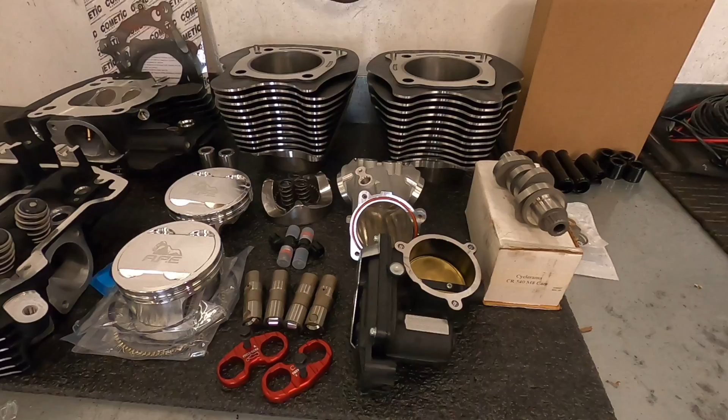But today, as the title suggests, we are doing a cam swap on this bike. So we're pulling out the 540, we're going to be putting in this CR470 and seeing what happens. So why are we doing this, guys? What's the reason for the cam swap? Well, a few reasons. One, I want to find out what's going to happen. Two, I'm sure there's a lot of you guys want to find out what happens. Three, I want some content.

And four, why not? Today, I'm going to be having my apprentice, Mitch, do a lot of the work here. He's done a lot of cam installations for me over the last 6 or 8 months, and he's really starting to get into the swing of things. So, going to be filming this video a little bit differently than I normally do. We're going to have Mitch doing a lot of the work. I'll be just walking around with the phone, filming him a little bit. I'm pretty excited to see what happens.

What do you guys think will happen? Do you think this thing is going to make more torque early, more torque later, less horsepower, more horsepower? What do you think is going to happen?

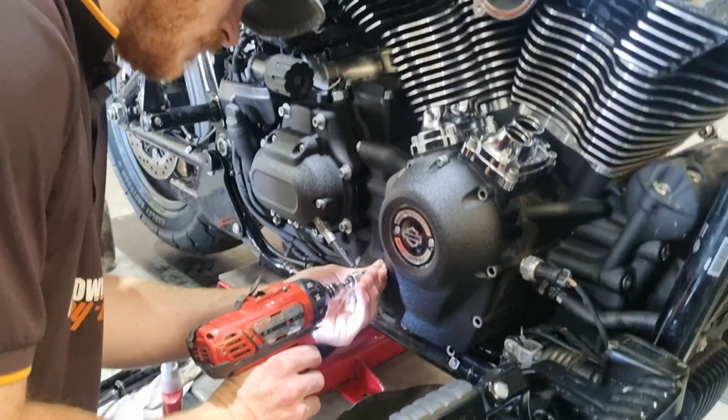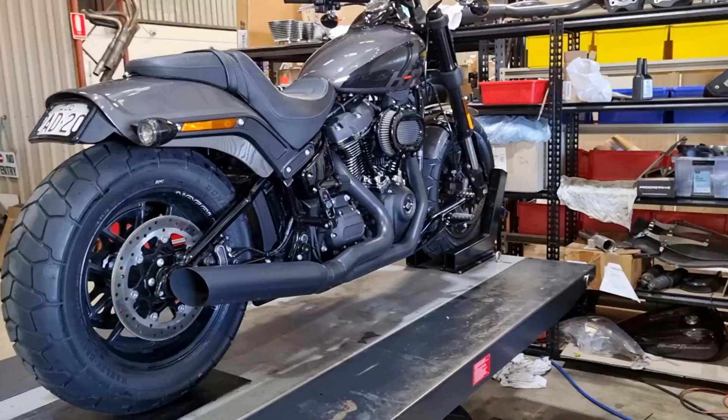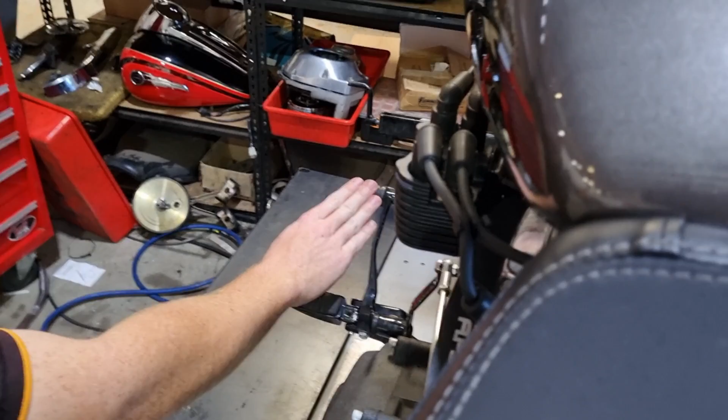First fire up. Neutral, need neutral. Just pull the clutch in, I'll keep going. I'll just tap the starter. Keep going. No, keep going all the way down, mate. It's not neutral yet. Keep going. Yeah, that's it. Now just bring it back one. Go down one, mate. Yep, there you go. All right, you start it.

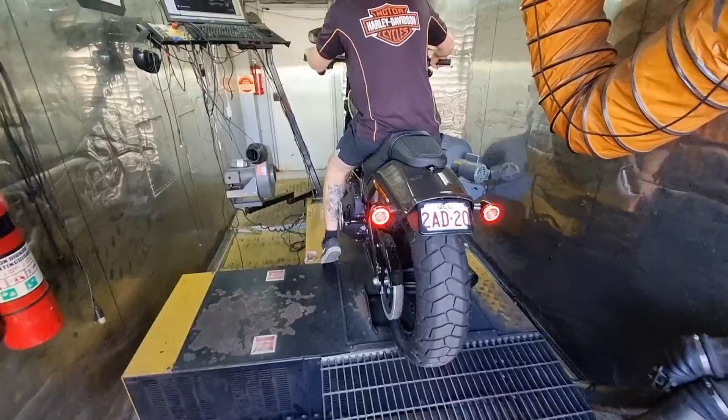Alright guys, so I've just got the tune loading in here. I've just made a few adjustments to the original map that I was using with the 540 cam. It was making 145 horsepower and 143 foot-pounds of torque. Right now we'll get this tune loaded in here. Let's see what happens.

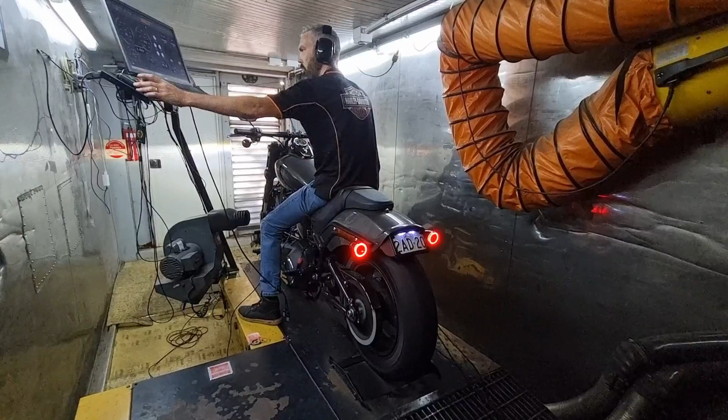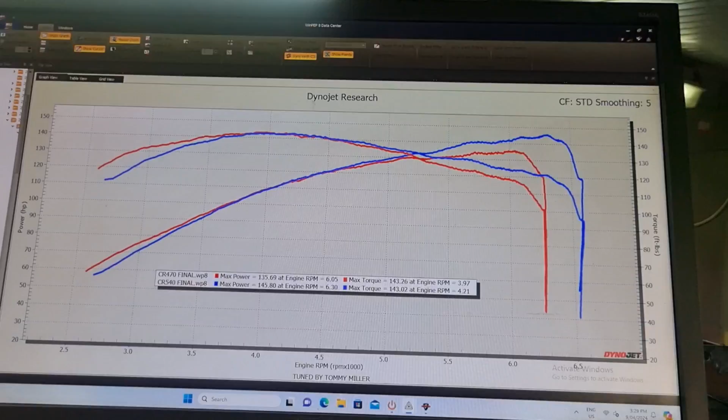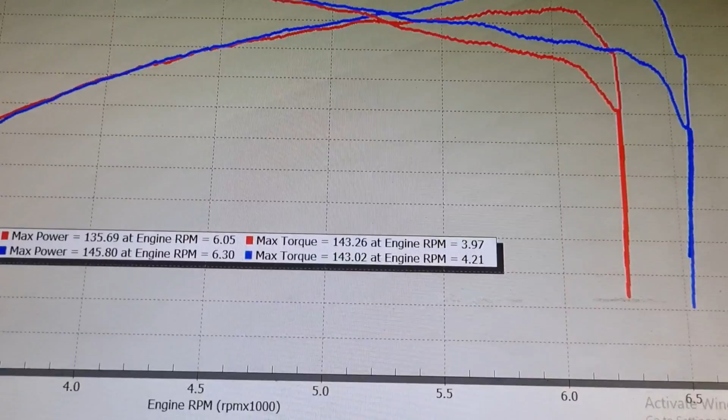Righto guys, the results are in. Let's take a look. So I've got to stand down here because I'm too tall for this dyno. If I stand up here, I keep hitting my head. I've got to crouch. So the blue one was our 540 cam and our red one is the 470. Now, some of you may get your knickers in a knot over the loss of 10 horsepower. It is a smaller cam, of course. But have a look at the torque, guys. Identical. Identical torque right in the mid-range here.

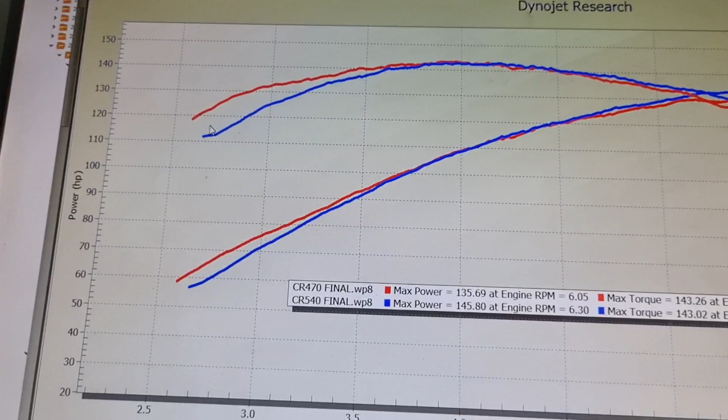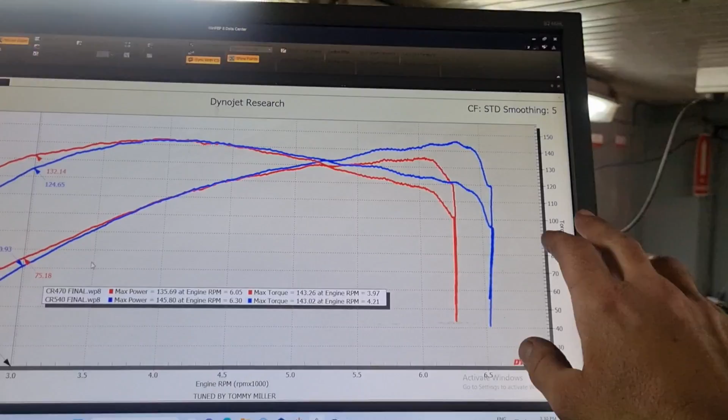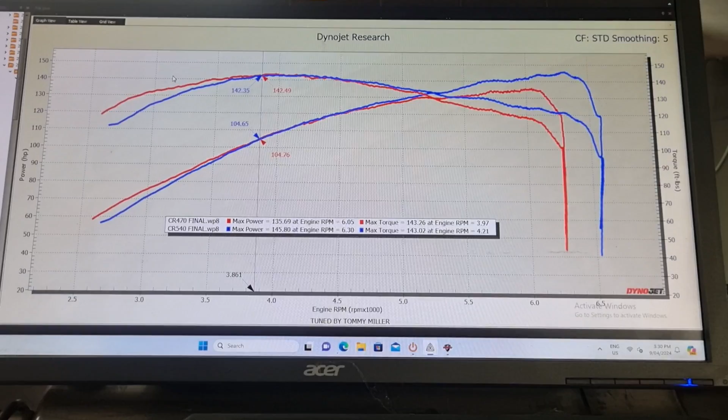But look what our smaller cam did. Brought that torque in a lot earlier. Well, it's the same RPM, but it's brought more torque in for the same RPM. So while this thing, of course, will be slower over the quarter mile because it is making less horsepower, it is going to feel faster to ride on the street because you have a lot more out of the gate, and you're definitely going to feel that pull straight off the line when you open the throttle. So stoplight to stoplight, this thing is really going to feel a lot faster.

There's only one way to see what this thing feels like on the road, so that's time now for me to take it for a ride. But yeah, I'm pretty excited about it because obviously I've ridden this thing and I know it does have plenty of grunt. Like if you saw the first initial video, the thing does skid. Having that torque in earlier, that is what you feel when you open the throttle and hit it. So I'm very, very keen to take this thing for a ride, so let's do that.

Guys, I just thought I'd pull over here real quick. Initial reactions, you cannot tell that thing is down on power at all. I mean, it is a much stronger bike out of the gate. There's a lot more punch straight out of the gate. If any one of my viewers have ridden this thing, come back and ride it again. I urge you to come back. There's so much more torque out of the gate, it just feels like a completely different bike. So let's keep riding it.